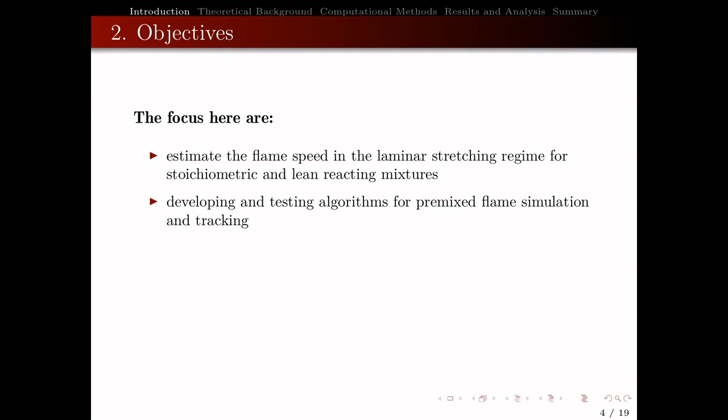developing and testing algorithms for premixed flame simulation and tracking, analyzing the flame kinematics under different definitions of the location of the flame sheet, and observing the effect of flame curvature on local stretch rate, displacement speed, transport, and reaction within the flame.

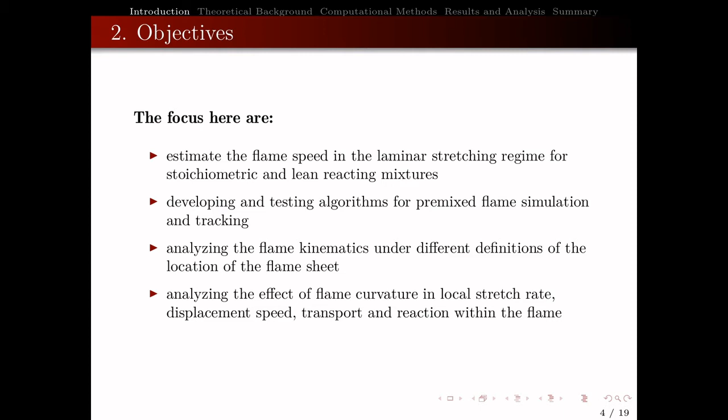The flame speed is one of the staples of combustion theory. It has a precise meaning when the flame is planar and propagates steadily, because the mass flux through the flame is constant and uniform. For 2D and 3D flow, the flame speed is not uniform. So the flame undergoes a continuous stretching, which affects the transport rates and results in a non-uniform burning rate.

In the scale of fluid flow, the flame shrinks to a sheet in which it's assumed that the fluid properties jump from cold to hot state. This means that the flame thickness is a boundary layer that moves with velocity Vf. Then the flame speed can be computed by the difference between the absolute velocity of the flame front minus the incoming gas velocity.

But if you apply a zoom in and take a look at the flame region, we see a coupling between flame structure and fluid mechanics. The flame has a thin thickness that forms its geometry, and it can be deformed or stretched with the fluid flow interaction. However, this definition of flame geometry becomes ambiguous unless some property of the structure is identified as a reference frame.

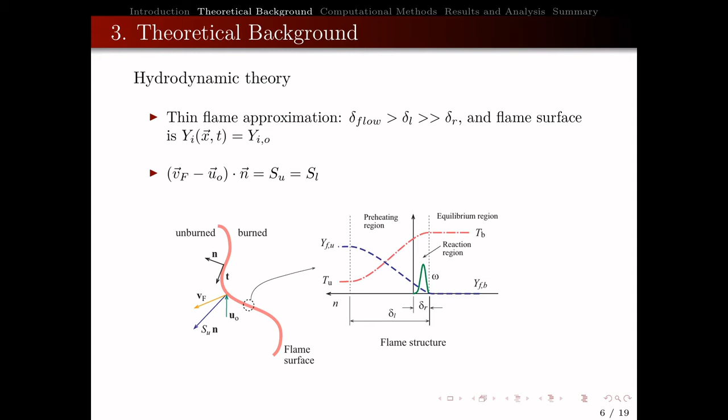Here in the first item, we point out that the flame front can be represented by a mass fraction of any species I. So, in thin flame approximation, the flame can be associated to some species mass fraction. As illustrated in figure A, since the fluid flow acts in this geometry causing a variable or a constant deformation, the stretch rate is defined as the rate of flame surface element deformation.

Looking at figure B, the stretch mechanism can be divided into components: a tangential deformation due to fluid strain rate, and the local displacement speed times the divergence of the normal isosurface, defined as the geometry curvature, kappa.

The local flame speed in the thin flame approximation is a linear function where the perturbation of the flat flame speed is related to a linear coefficient, this fancy letter L, called Markstein length, and the local flame stretch. To facilitate the analysis, the local flame speed equation is made dimensionless and normalized in relation to the flame thickness and flat flame speed, which gives rise to the Markstein number and Karlovitz number.

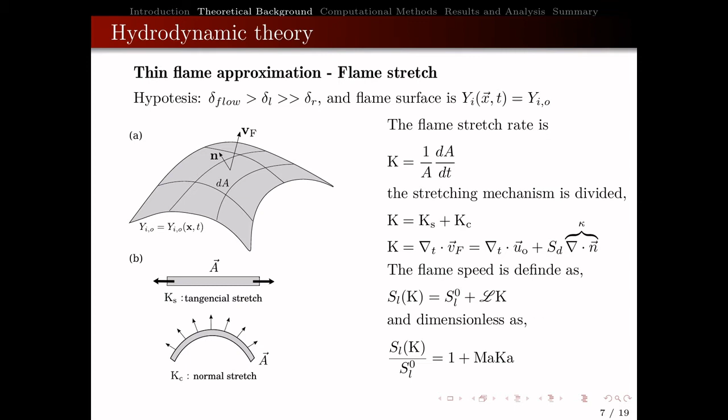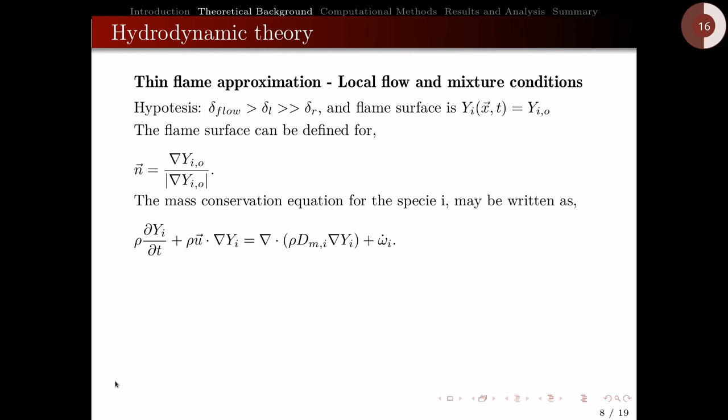From the definition of thin flame approximation, the isosurface can be defined by some flame structural property. The normal of the front is the gradient of this property divided by its modulus. So, the normal of the isosurface can be used in the conservation equation for species mass fraction. This gives rise to the definition of local flame displacement speed Sd.

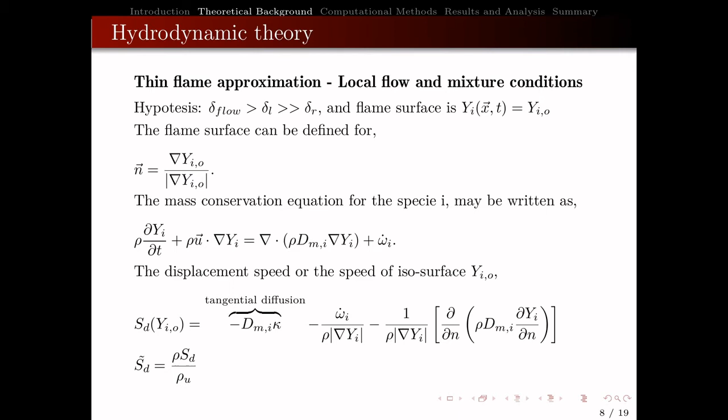The two last terms are related to reaction rate and normal diffusion, which are present also in a flat adiabatic flame. However, a term shows up related to tangential diffusion, responsible for the flame deformation. For meaningful comparison between values of the displacement speed at different locations, Sd is often normalized by the ratio of local density to the density of the incoming gas. This is called the density-weighted flame displacement speed, which can be directly compared to the planar flame.

Some details of direct numerical simulations are presented. In DNS simulations, you solve all conservation equations without any model. So here we use EBIdnsFoam, which was developed in 2012 at the Engler-Bunte Institute at Karlsruhe Institute of Technology. It is implemented in the open source code OpenFOAM, which is coupled with the well-known Cantera library. Cantera is responsible for computing the transport properties derived from kinetic gas theory.

The solver uses the finite volume method to solve the fully compressible Navier-Stokes equations for reacting flows. For this problem, a rectangular structured mesh was used, providing at least 30 cells to resolve the laminar flame thickness. The simulation was carried out in a two-dimensional axisymmetric domain with a height of 20 mm in the streamwise direction and 5 mm of width. A Poiseuille velocity profile is imposed in the half of the slot inlet where the reacting mixture is incoming, and zero velocity is enforced in the remaining part where air is present.

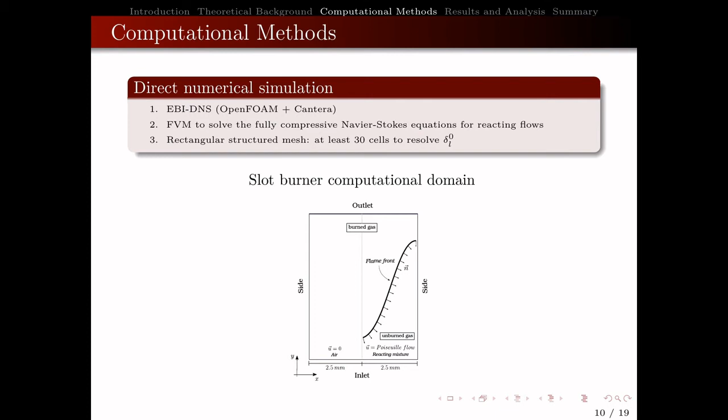So, some important definitions used here: the simulations were performed at atmospheric conditions, which avoids the chemistry of low temperature combustion at the flame inlet. The behavior of two fuels was studied, methane and DME, which can be produced from biomass. To look at the effect of stretch on flame structure, two different isosurfaces were chosen in different regions. The first one represents the flame preheating zone, considering 90% of the unburned fuel mass fraction, and the second one the reaction zone, where the isoline is taken at the maximum heat release rate for the fuel mass fraction.

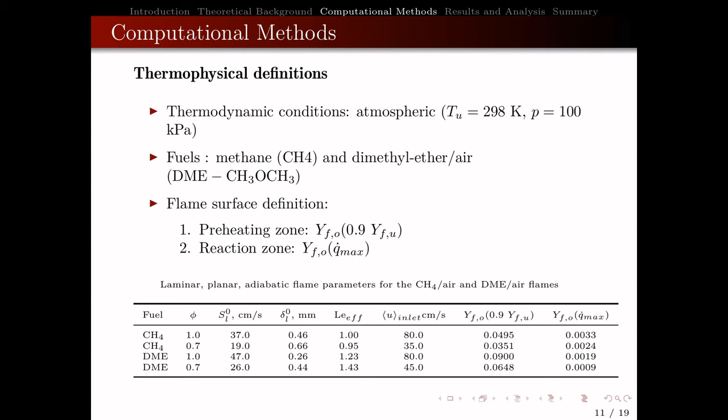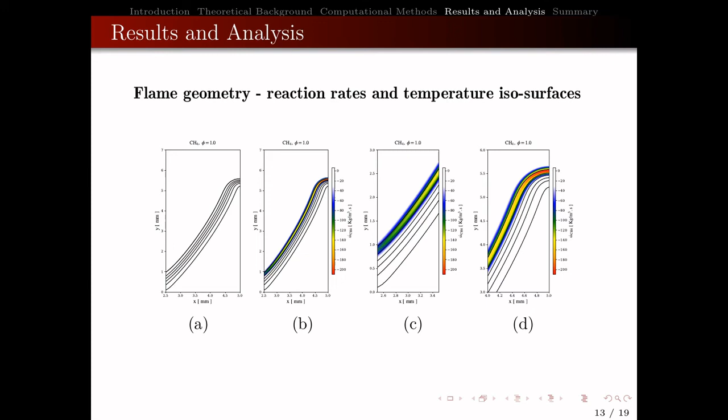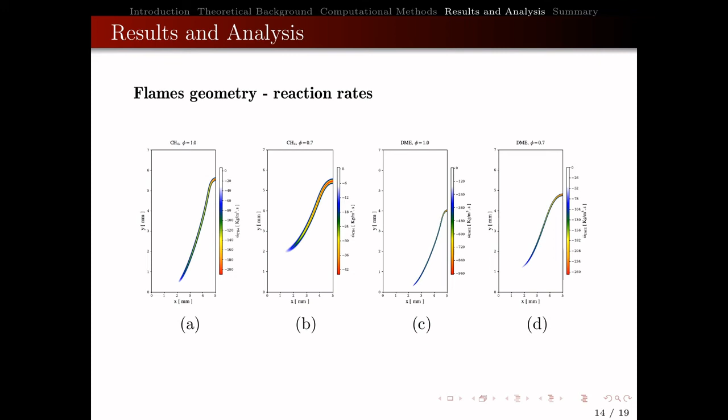The direct comparison between fuels shows that DME at stoichiometric mixture in figure C presents the higher laminar flame speed, resulting in a thinner flame, shorter cone, and smaller lift-off distance. As the equivalence ratio is reduced to 0.7, the flame thickness and lift-off distance increase, more for methane than for DME. The flame tail is also displaced to a position farther from the slot half width, resulting in fuel leakage and air entrainment.

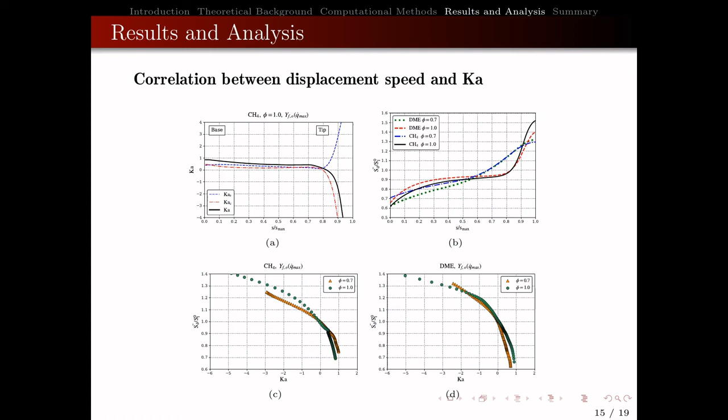Towards the tip, the Karlovitz number becomes negative due to negative curvature and the displacement speed increases with respect to the planar flame. The stoichiometric flames present a sharper tip and therefore reach large values of Karlovitz number. The structure of the two-dimensional flame is affected by the tangential components of convection and diffusion fluxes, disturbing its original arrangement.

So, observing the graph A, the hydrogen profiles for the positive curved region present a deficiency in the preheating and post-reaction region. Both the production and destruction rates in the figure below are reduced. The oxygen mass fraction is not strongly affected, but the hydrogen deficiency has an effect on the oxygen destruction rate. As a result, both the energy diffusion flux and heat release are reduced, as is highlighted in figure F. The distributions for the region with negative curvature follow the opposite trend.

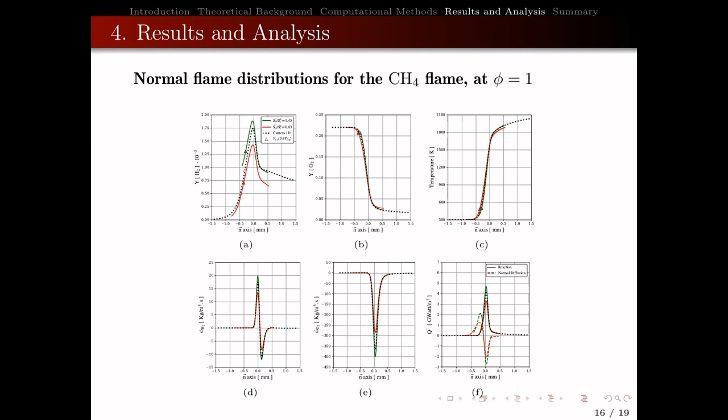The effects of flame curvature, normal, and tangential strains on the flame stretch rate and flame displacement speed were studied using DNS for slot burner flames of two fuels, methane and DME, at stoichiometric condition and phi equal to 0.7. So our considerations so far are: the strain and curvature contributions to the Karlovitz number have the same intensity in the region of positive curvature, but the curvature contribution becomes strongly negative and dominant in the concave curvature region.

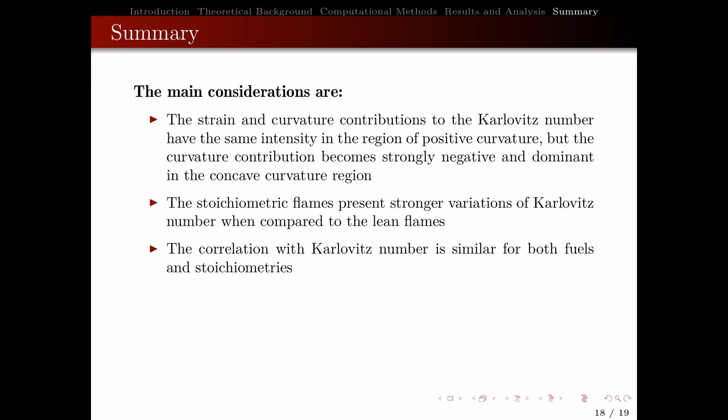The stoichiometric flames present stronger variations of Karlovitz number when compared to the lean flames. The correlation with Karlovitz number is similar for both fuels and equivalence ratios, since both fuels hold stable flames. The mass fraction of hydrogen along the flame surface presents strong deficiency in the positive curvature region and strong excess in the negative curvature region when compared to the planar flame.

So for now that's it. More results and details can be seen in the paper.